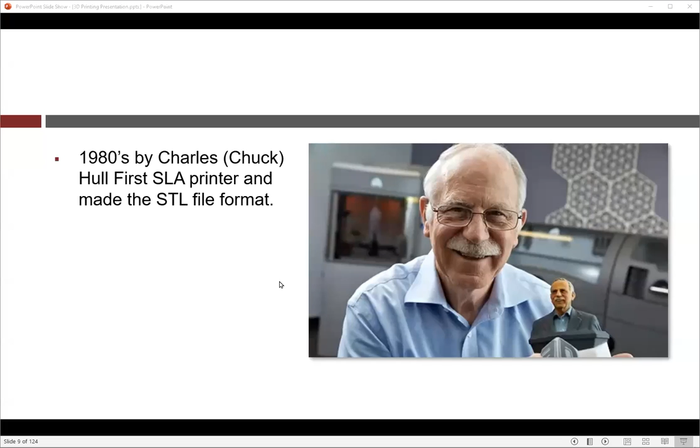So here is the father of 3D printing. He made the first SLA printer, and this is the printer itself and the actual object that he made. He did this by scanning a UV laser over a pool of polymer, and that polymer reacted to the UV and solidified layer by layer.

Aerospace is a biggie now. A lot of people have been seeing not only the Mars rover, but also SpaceX. SpaceX has been using 3D printed parts, especially for their Raptor engines, quite exclusively, and they're able to make parts with internal piping and capillaries that would be impossible to build any other way.

Archaeology. I know various archaeologists are scanning various artifacts and preserving them, also allowing those artifacts, especially if they're single artifacts, to be brought to classrooms and even tested and used for experimental purposes.

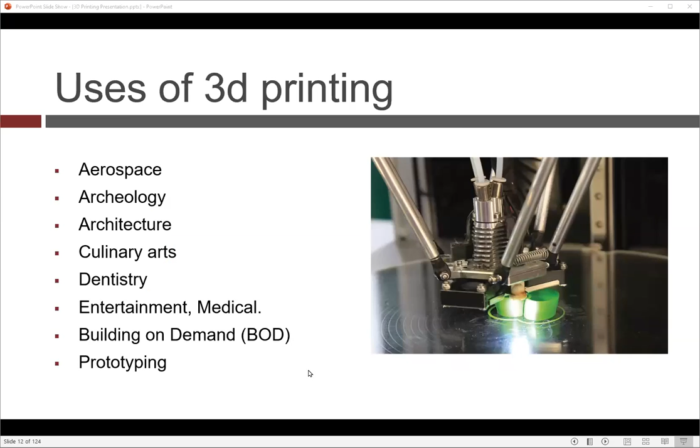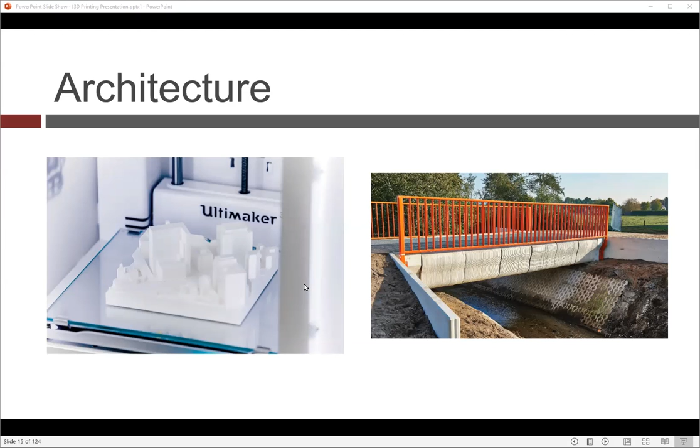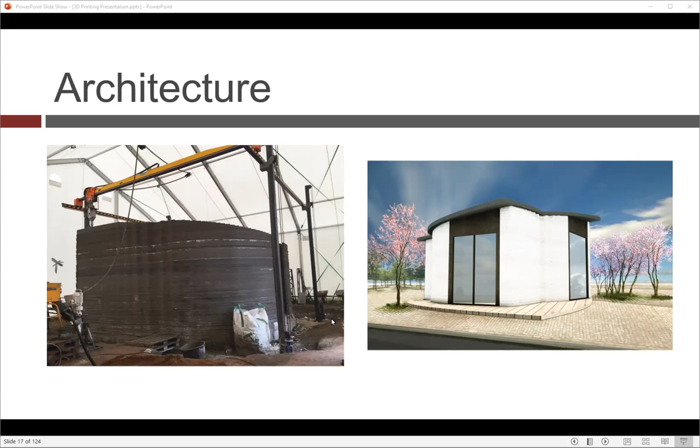And one of the things we're able to do with architecture, as you can see with this building, is print on a curve. Curves are very difficult to reproduce constantly using cheaper materials - they require molds, and anytime you have to do a mold or a prototype, it gets expensive. So this way you're able to print it, and then you're done. Cost effective.

All sorts of interesting things. One of the cool things about the culinary arts is that you wouldn't expect it to be in, let's say, catering, but anything that requires a rote action, hundreds of times over and over, is great to set up with a printer or something mechanical that you can run through. So they have a couple of 3D printers going, and let's say they have a very delicate pastry.

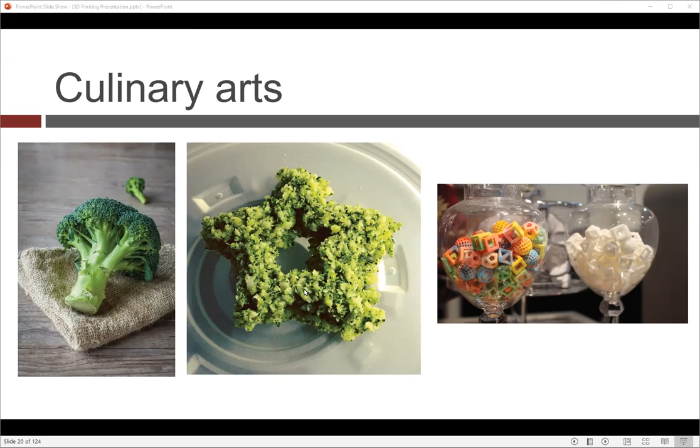They can have the 3D printer go out and actually make that pastry in the exact shape that they want, before they cook it in the oven, and they don't have to sit there and do it. It's exact every single time. So they're using that for effectiveness, and it's used a lot more than you might think in the background.

And in dentistry, the SLA printers, the resin printers, they use this quite substantially. In fact, most of the dentists I've talked to own at least one of these printers.

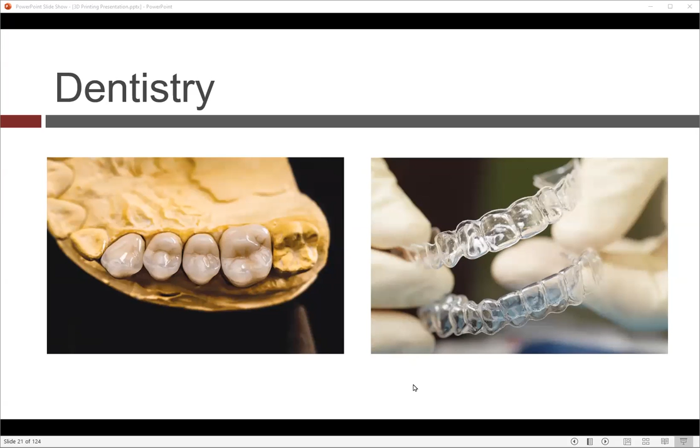In the medical field, not only building replacement parts, because each of these has to be custom made, but a big push has been happening recently with makers all over the world printing out hands and other prosthetics for children and people who can't afford prosthetics. The only thing you need to replace is you just keep all the screws, and they'll print you a new one when you grow. So for children, this is a wonder because they're able to have prosthetics that grow along with them.

I just want to add that we have a couple of links in the book to some projects, because there was a school out in the Midwest that took it on as one of their community projects, using their 3D printers to print prosthetics for a group of people and then send them out. All they needed was a photo and the size measurements, and they were able to use that to determine the size of the actual prosthetic.

What was really interesting about that article was that the middle school kids did the 3D printing, but they also helped the elementary students actually assemble them, putting the screws and things together. So they brought most of the school together to make hands that they gave out to people who needed them. It was rather interesting.

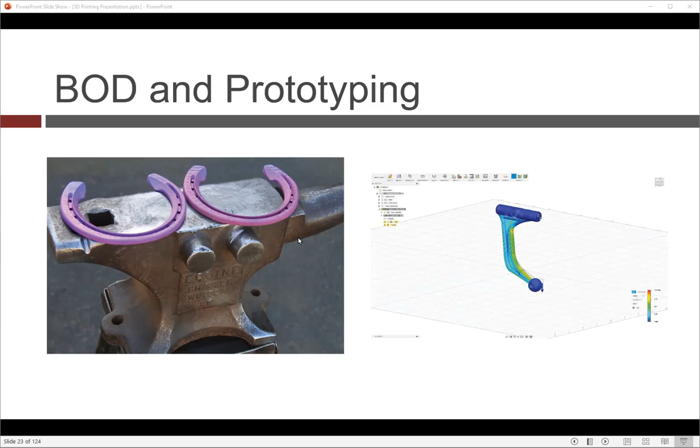And build on demand, this is a big area for 3D printing. Actually, this goes hand in hand with prototyping. It allows you to build something and make a one-off very quickly and very reliably, when normally you'd have to go through quite an extensive process to make that first prototype, or modify a non-custom part to fit a custom fit, like the horseshoes here.

Before we continue on, I actually neglected to do this at the very beginning. Is everyone here new to 3D printing? Have you touched a 3D printer before? What are you looking forward to with the 3D printer that the regional center has purchased and has available? Just curious.

Well, I'm new to it. We have one in our school, two actually, I think. And we have a makerspace that we're creating, so I wanted to learn how to use it so we can help create a curriculum and teach the kids. But the kids already jump right in and use it, and it's pretty exciting. Of course, that's great. Thank you.

Anyone else? Yeah, I just think there's a lot of opportunities for teachers to try this. Gary, that's great to see what you said. Because that's what we're thinking, teachers just need some opportunities to play with a 3D printer. Both of my children have 3D printed all kinds of things, but I haven't really played with it myself. Yeah, I'm looking to make 3D models of mathematical ideas for my classroom, like fractals and dimensional things.

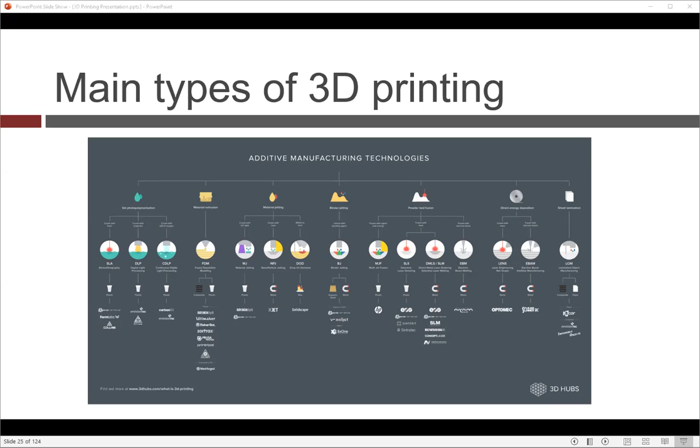Okay, stereolithography. This was one of the very first methods of 3D printing, and it's quite interesting. You scan a laser beam, you trace out an outline of the object you want in resin. That resin reacts, and once you're done a layer, the platform moves, and you rinse and repeat to another layer, continuing until you complete the object.

This is a very precise, very high resolution method. It can make parts that to the naked eye look like they've been blow molded, very smooth. So that's that version.

Okay, this is the second version. This one is very similar, uses the same plastic resin, but it does it inversely. It actually hangs the platform into the resin, doing it at the interface at the bottom. There's a piece of clear plastic at the very bottom, and either a light source is reflected up onto the resin, or you have an LCD screen, just like a normal computer screen, that acts as a mask for UV light.

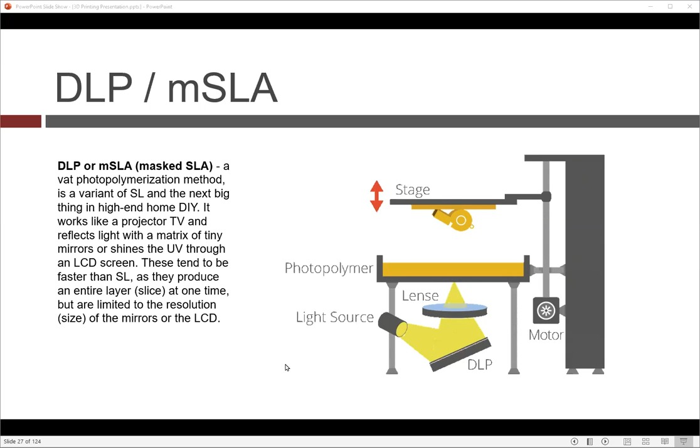Laser sintering. Another one with the laser, but rather than having the laser react with a photosensitive material, this is actually melting the material, whether it be glass, metal, or particles of thermoplastic, anything the laser can melt. Each layer, a new layer of material is dusted over and flattened, and that layer is effectively welded onto the previous layer, then the platform moves again.

And this is the one that most people are familiar with. I liken this one to, and you can actually buy these in the store, a hot glue gun on a plotter. You have an XY plotter with a hot glue gun. You have plastic material that you can melt, and you just follow an outline.

Coupling that with a computer and stepper motors and a full gantry, it can repeat that very precisely over and over. But when it comes right down to it, it is a hot glue gun. You can actually buy handheld 3D printers, a 3D printing pen, they call them, and build your own freestyle 3D prints, which is kind of fun.

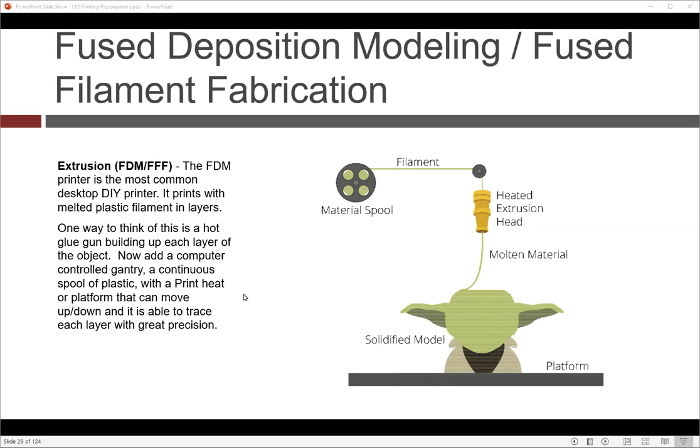So we're going to focus on the FDM and FFF type of printers here, because these are the ones you'll be working with. There are three major types. We have them outlined here, but they all incorporate...

Is that? Yes, yes, yes. Let's see here, what was the name of that? The Flash Forge. Yes, the Flash Forge printer. Oh, I had the name of it right here. We actually get into it later. The Guider 2, I think. The Guider 2, that's what it is. Yes, yeah, so that's what I was looking at.

I actually put the picture of the model here in later. So all of them effectively have a framework where you have X, Y, and Z motion and a printing head.

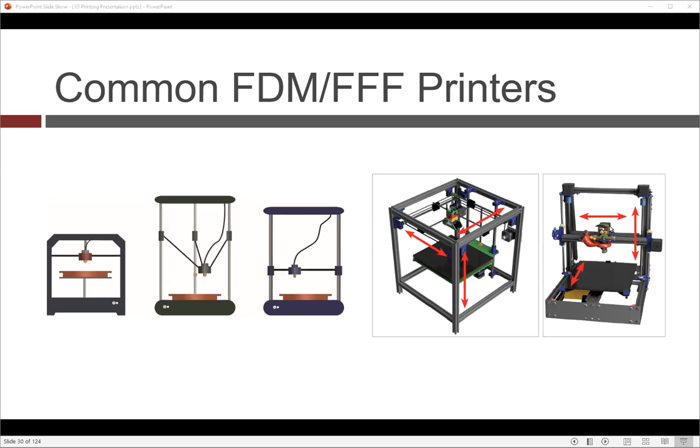How you get to that is done in three different ways, and here's a picture of three different types. This one has the bed move while the head moves up and down. This one is reversed, the head stays in this plane and the platform moves up and down, and this is a completely different type. As you see, they can use different coordinate systems. If anyone wants more information, it's in the book and I can explain it more later.

Usually this is kept from you with the software. I see someone laughing about that, but it is actually quite interesting. All right, and yes, the Flash Forge Guider 2.

So yes, that wonderful hunk of wood on the left-hand side is my first 3D printer, all custom made. It came as a kit from Makerbot, one of the first retail kits out there.

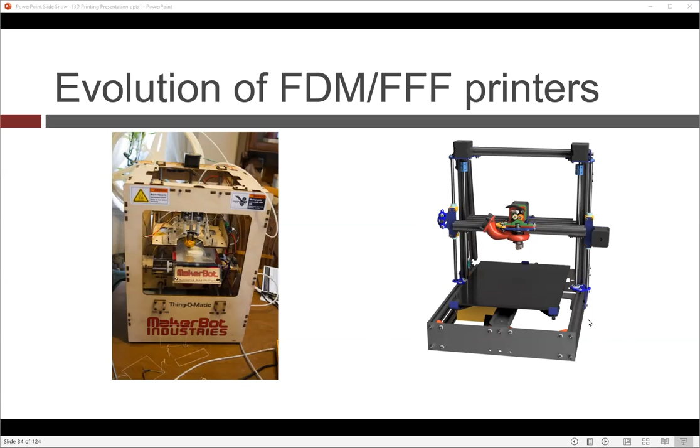This one on the right-hand side, you'll see these all over the place. This is essentially what's called an i3 configuration. A lot of cheap 3D printers, and some good ones too, will look like this because they're easy to manufacture, and there's very little to go wrong with these.

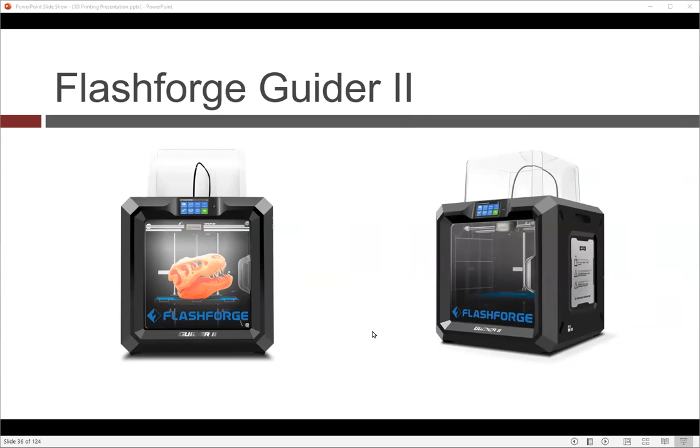So let's go over what actually goes into a 3D printer here. First, you have your filament - we're just going to go over this real quick. This is the thermoplastic in a spool. This is your extremely long piece of hot glue.

Am I going too fast, or is that good for people? Okay, we got at least one good.

Okay, getting a little bit more into the nitty gritty - the filament comes in two different sizes. The original 3 millimeter size was prominent when 3D printers first came out. These spools are actually used in factories, and the factories would run these, cut off lengths of them, and melt them as needed. Having such a wide diameter filament meant that the extruders in these DIY printers couldn't be very precise. As 3D DIY printers started becoming more popular, they made a smaller size, the 1.75 millimeter size, to allow these printers to be a lot more precise.

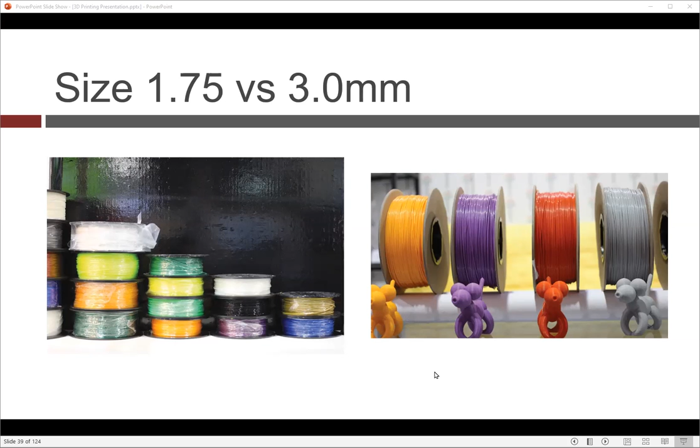So nowadays, most printers, except for the very large ones, will use 1.75. So if you're looking for buying filament, chances are it's going to be the 1.75 unless you have a specialty printer.

Like a typical little statue that you would have, this might not come into it. But if you're making a part for a geared car, or a little motor or something like that that has moving parts, you might want something that has good toughness, maybe some good rigidity. If it's going to be something that you're going to attach and you don't want it to snap right away, you want it to have some give, to stretch before it gives up and breaks. So this will come into the next section here.

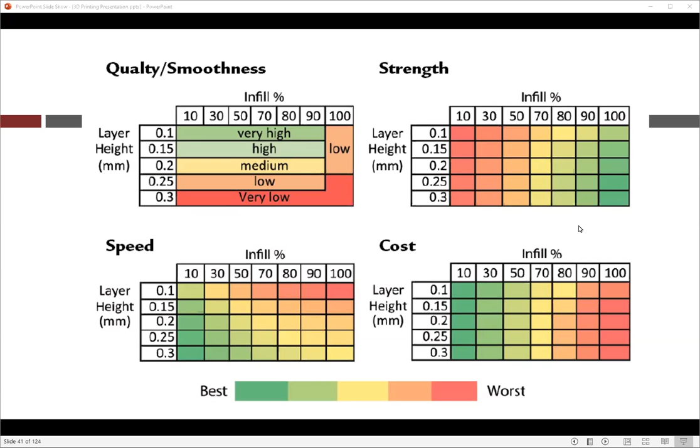If you increase... we'll get farther into this. This will come up again, but I want you to know that the materials themselves have all their own abilities, and how you print them will change those properties.

I think we lost you, John. Can we hear? There's no sound, John. Yeah, something happened. There's no sound. Hello? Yep, now we hear you. All right, well that was really weird. All of a sudden I heard a beep and I was gone. It wasn't me this time, I swear. Okay, well it's still sunny out, so no thunderstorms yet.

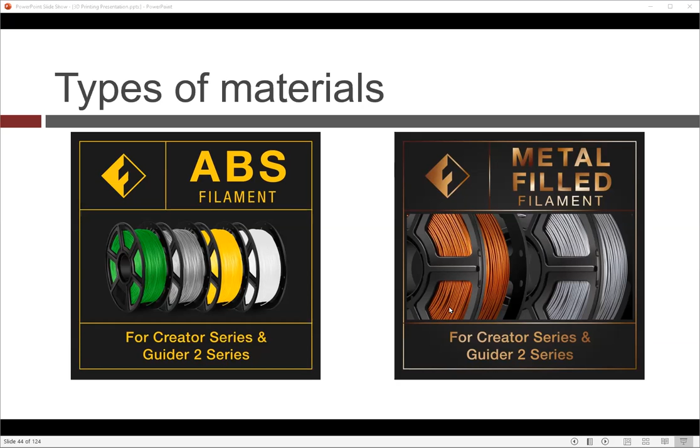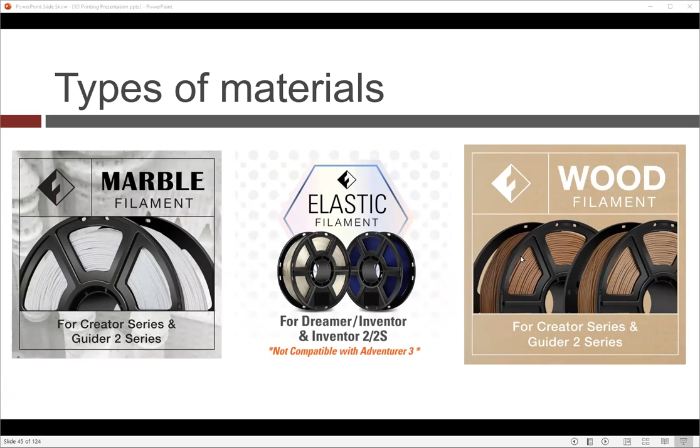This has small particles in it that give kind of a marble look. This wood filament actually has small particles of wood in it and is actually stainable, so this is quite fun. And this again is PLA, and this is also PLA. So you'll get the most variety with PLA.

Now, all of these plastics give off ultrafine particles and some volatiles when being used, so having a large, ventilated room is ideal. Another good point about PLA is that because it's done at a lower temperature, it's the least offensive here.

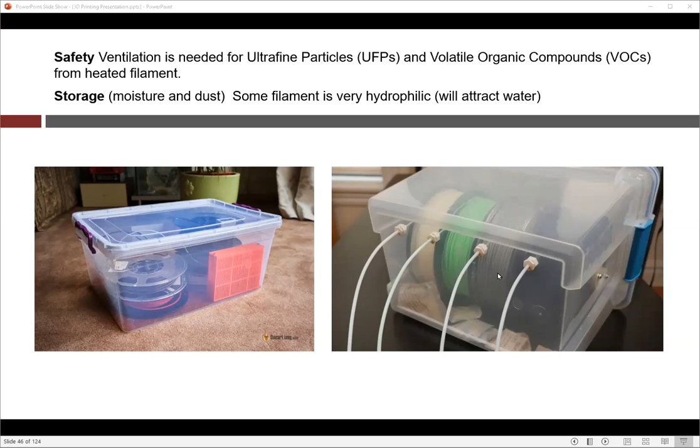So also, you'll want to keep all your filament in a container, especially materials like nylon, which will attract water, swell, and then when you try to heat them, create steam, and you'll have problems printing with them. So you want to keep them nice and dry. This is actually a little printing booth someone made here to allow you to print without being exposed to air. It's an issue where if you left a spool of filament out for a month, that spool might not be good anymore—it might get brittle and no longer be good to print with. So that's a consideration.

Is there any questions at this point?

I know, I'm going quite quickly here. If I'm going too fast or people have questions, do ask, because there's a lot of information I'm dumping here, and it just gets a little bit more dense until we get into the classroom area.

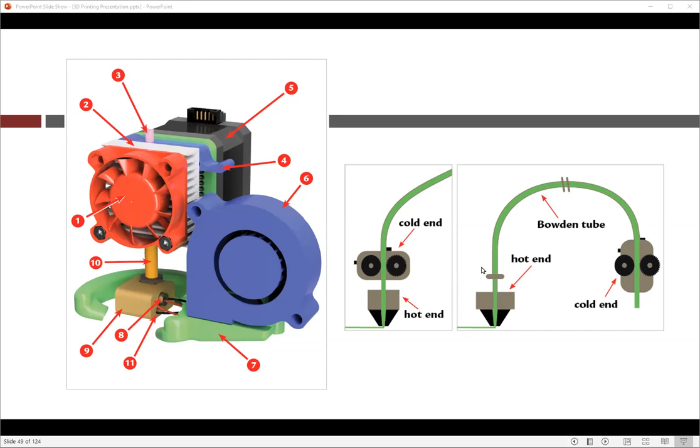Here's just a close-up. This is fairly typical of a hot end across most 3D printers. As you see, there's a little spring, and this toothed gear pinches and brings down the filament. This can be an issue with flexible filament - you'd definitely want a direct drive for flexible filament, because it's hard to push a rubber band through a tube.

This actually pulls it rather than pushes it. This is the hot end. You have your heater cartridge, and then you have your thermistor, which controls the temperature of the hot end.

This is your nozzle, and this is the heating block to keep enough heat to continuously melt the material. Some faster printers can actually push material faster than the heater can catch up, so these heater blocks can get quite massive to hold that heat.

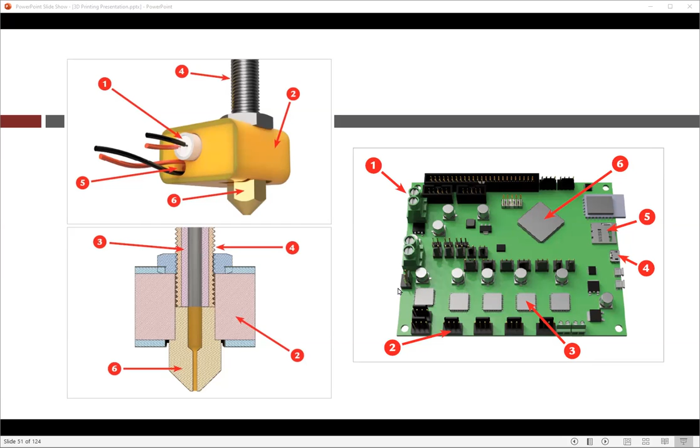Oh, okay, never mind. And on the right here is a typical motherboard with CPU power and stuff like that. This is less important—and here are some glory shots of your new printer.

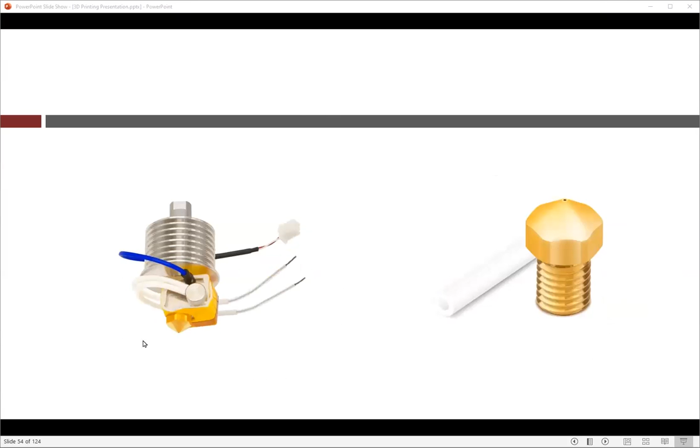This is part of the sensor that allows you to level the bed. It actually does have a fan and a filter that filters out the VOCs and particles, which is very nice. This is the hot end that's in that plastic container and the nozzle, and this is where the filament guide is.

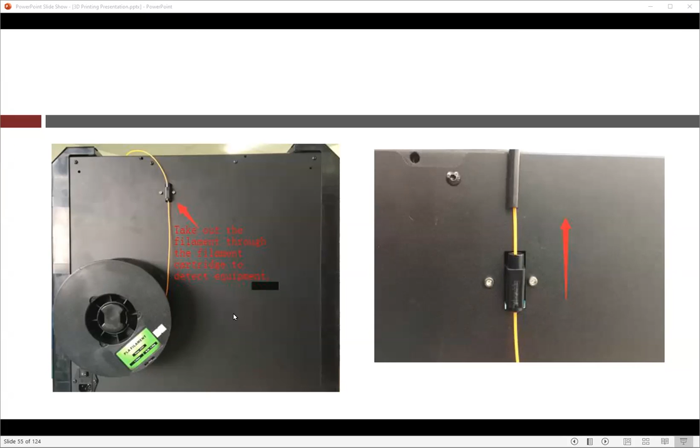One of the nice features with this printer is if you run out of filament, it will pull it through here—this is a switch. It will stop the print, pausing it to allow you to load a new spool and start the print where it left off, which is amazing.

Any questions from there? I went kind of fast—I hope that wasn't too much of an avalanche of information. No, it's great info. Okay, we're going.

All right, so now we're getting into software, because all in all, this is a software-run machine, and software comes into the process at a couple of points. The original objects you'll be printing out will be models constructed by a variety of different pieces of software.

Here's a quick list of very common ones: Tinkercad, Sculptris, and everyone has 3D Builder on Windows. These programs allow you to either make parts—some of these are CAD programs—or, like Sculptris, are freehand sculpture programs that allow you to make very organic shapes, people, animals. Some programs do a bit of both. Make Human is dedicated to making humanoid shapes.

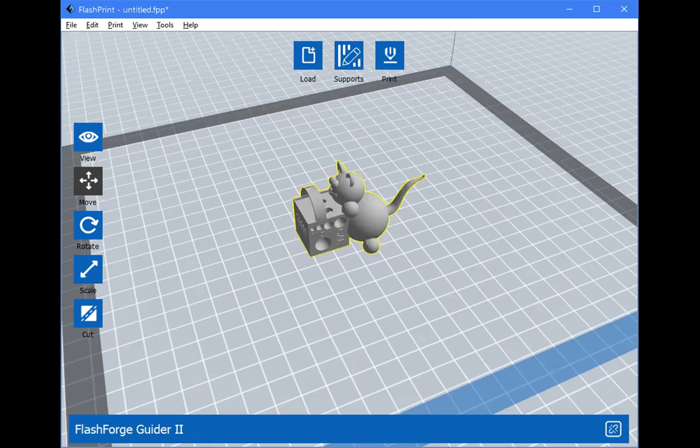And let me see if I can transfer you over to... there we are. Can everyone see that? All right, so we're now live in FlashPrint.

This is one of my test models. It's the Mau Cow, because cats. I made it myself, then imported it into this. I made this myself in, I do believe, Blender. It's in the models in the book too, so they can use it. And I modeled it to show off a lot of the issues you can have with 3D printing.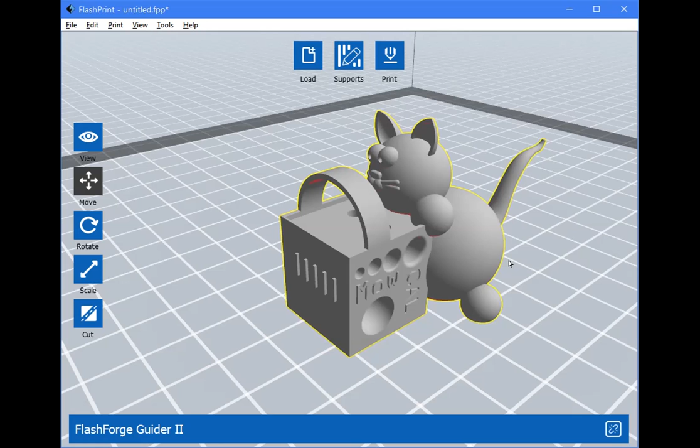Let's get a little off on a side tangent here when we're talking about overhangs. This tail, there's nothing under it, so when the printer starts trying to print this, it's going to be printing in the air, and it would never print this tail because it would just become a mess. So your slicer will have to do something about that. In fact, when you look underneath this, everything that's blue is on the build plate, the build surface. Everything that's red is an overhang. So that gives you a nice visual cue of what things might need to be supported.

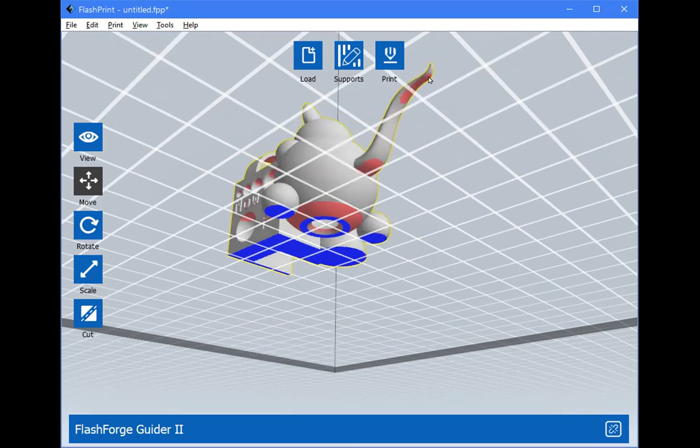So the end of this tail requires support. The mid part of the tail doesn't, because one layer can go on the layer below without being completely on top of each other - they can be offset. If they're only offset, you can make a 45-degree angle with absolutely no problems. Anything more than 45 degrees starts getting a little bit more dicey. When you get to about 90 degrees, it has nothing. Okay.

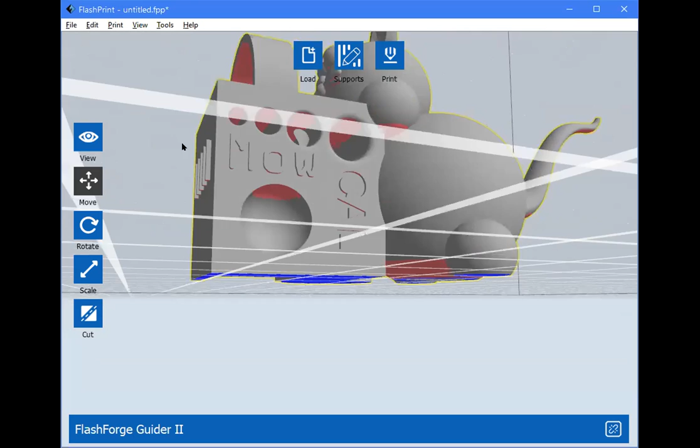Rounded surfaces tend to need support because the curve here is below 45 degrees, while the curve here is greater than 45 degrees, and same with this curve and some of these other areas here. I'll get into these internal spaces.

So from here, we get to see the top view, left, right, bottom. This is a nice 3D space, and you can move around in it. This volume is the volume of your printer, anything that fits into this square you can print. It's a good size printer.

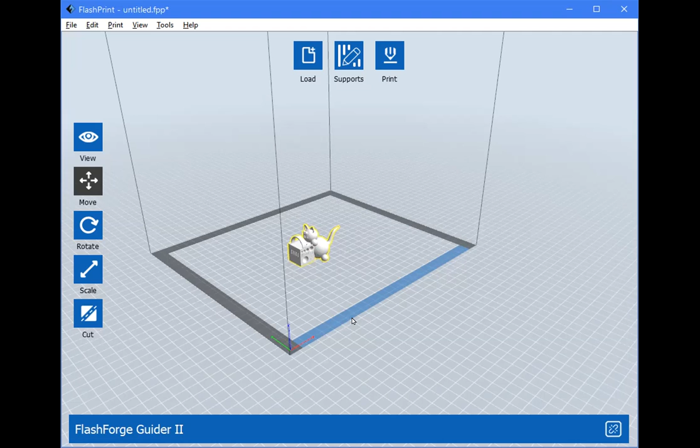That's quite nice, and I think this line indicates the front. You're able to move your part around, and this program will automatically orient it onto the build plate. You can see the stats here, and you can force it onto the platform and force it to be centered.

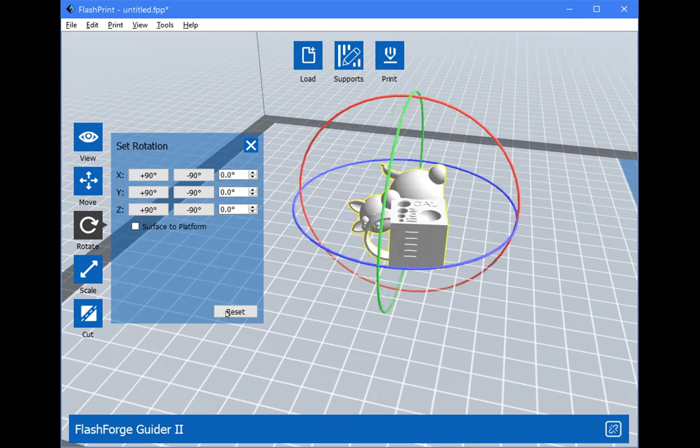Rotate - let's say if I want to print this on the side, I can rotate it in any dimension, or reset it back to where it was.

I can also scale it up if I want to, so I can make it larger or smaller. Let's make it larger, uniformly or by a certain dimension.

You can also cut an object. This is usually to break an object into two pieces because it's particularly hard to print, has too many overhangs, or there's not a good way of printing it. So you can cut it in half, put those two flat parts onto the build surface, and then glue them together later.

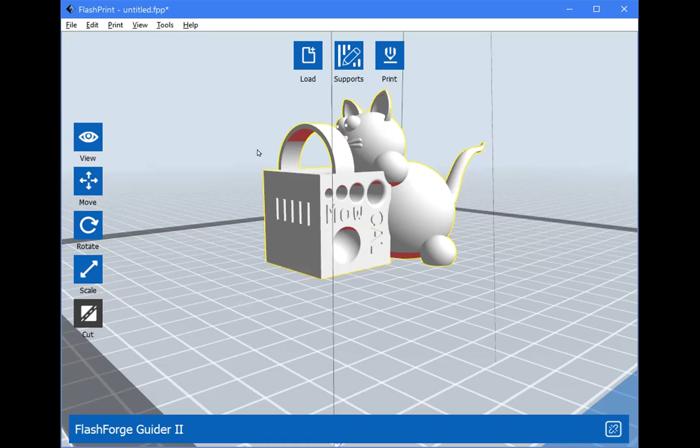Then when you're all done putting this on, now we can get into the support area and hit this wonderful button called Auto Supports. Let me change something real quick - it's doing the wrong type of support. There we go.

There we are. So as you see, all these green lines are where it's building up material, which you can break off later, and will support your model. And there's this line that I can put around, so I can put these supports in manually.

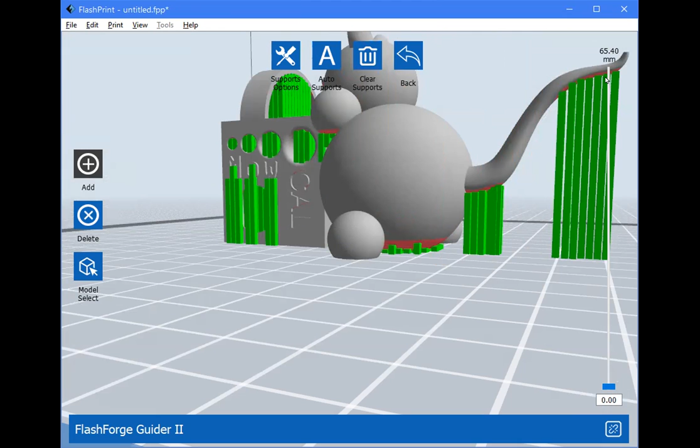Auto support usually does a pretty good job, and then you can finish it out doing manually. This is a little bit of an art form - you want supports, but you don't want too many supports. If you go overboard on supports, that's just wasted material. So you'll find that happy medium where you're just like, oh, this is exactly what sort of supports I need.

For this material - materials like PLA, like I said, is easy to print with. So, potentially, it depends again on the material and some other factors.

This can be a rough surface, so you're absolutely right.

When I was printing out the 3/4 scale head, I had the head leaning backward about 30 degrees, so all of the face was facing upward about 30 degrees, so there would be no supports on it. There was only a little bit of supports under the chin and a little bit in the back of the head and in the neck cross section. The rest didn't need supports. I think there were some minor supports under the ears and maybe one under the nose. So orientation can allow you to minimize where the supports are and thus minimize any damage the supports would make.

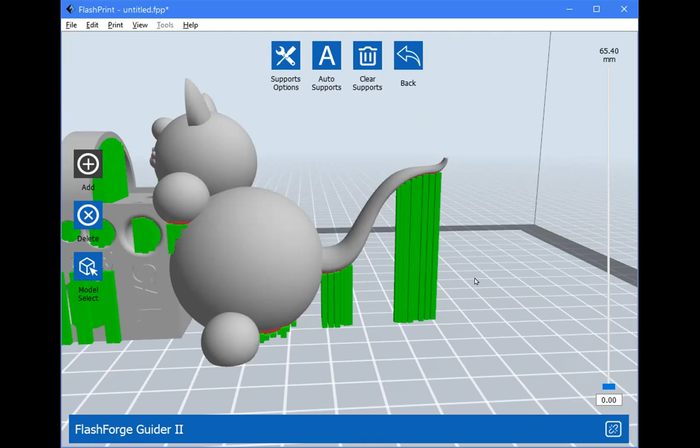And at the very end, I go into some quick cleanup and ways of getting rid of any issues, even using various putties to fill in cracks or rough areas if you're going to be painting them.

This model is particularly made to be painful to print. So if you can print this model out very nicely, that means you're doing a good job. If there is a specific issue with this print, it'll help you figure out what that issue is.

Like this tail goes down to a very fine tip - well, you have both supports here and the printer will be going over this very small area over and over again. That cooling ring that's on the printer cools the filament as it's being deposited.

If the printer goes back to that spot before it's fully cooled, it's just going to start moving around that material, and that material will also be getting hotter and hotter, and you'll get a mushy mess. There's degrees all the way in there. If you cool it too much, it might become brittle and not adhere to the next level. So finding that happy medium is a thing.

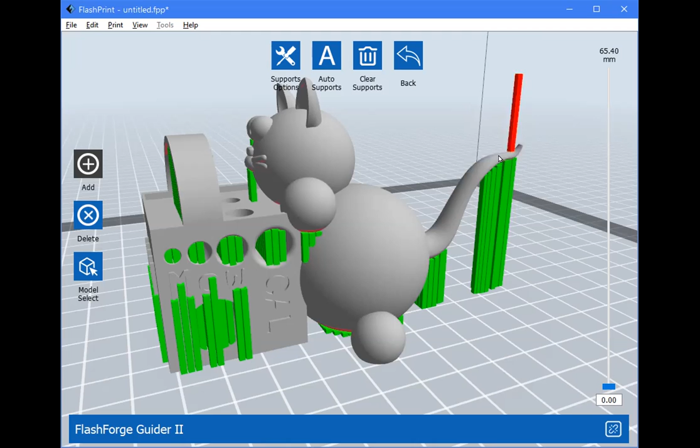Typically the program takes care of that, but it's a place that you can play around with, finding how much cooling you use. PLA loves cooling, so it's a wonderful material to use.

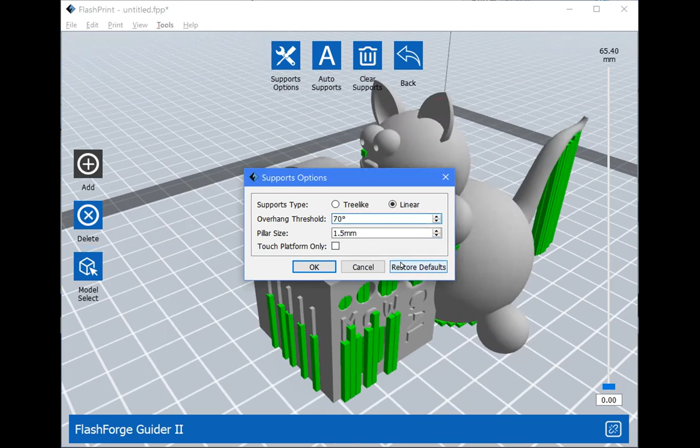With this handout, there is in the book a list of troubleshooting. So, seeing a problem, you can look in the troubleshooting area and identify what the problem is. As you see here, I can actually change the overhang threshold, hit supports again, and as you see, I increased the limit so there's less supports. So with PLA, you might be able to get away with this.

With ABS, probably not, because it would sag.

So some fun things here, and then you would go to the print menu. You'd pick which printer you need, what type of material, because it will handle some of the things like cooling, how fast it's pushing the filament through, and various other options through material types, whether or not you have supports enabled.

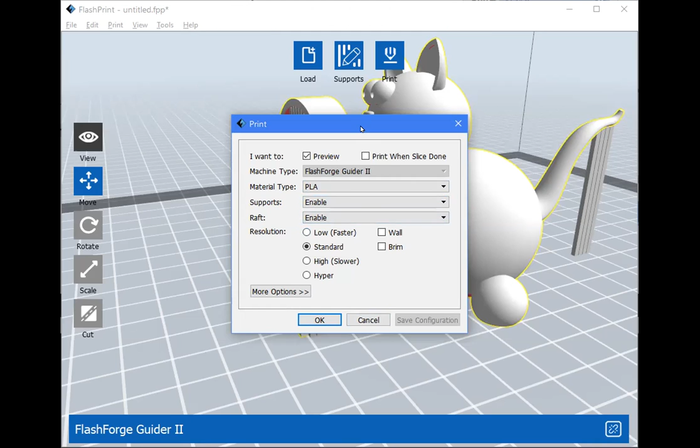A raft will allow you— so what, let's print a raft. I just told it to do its thing, and it's now slicing it.

All right, now this is a fully sliced object. I made it large, so it estimates that this is going to take 4 hours and 17 minutes to print. It's going to use 14 meters of filament, which isn't actually a lot.

And we can actually look through this and see all the layers. So this base part right here, which wasn't there before, this is called a raft. This allows you to build on plastic rather than the build plate. Old school 3D printers, getting that build plate perfectly level was super hard.

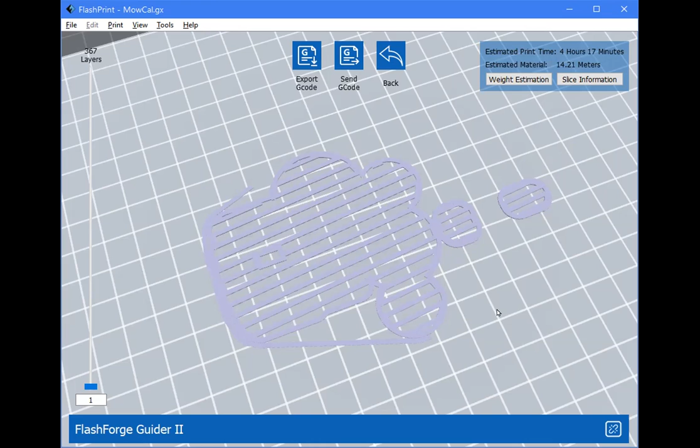So you almost always printed on a raft because you don't want that print head smashing into the build plate. If it was just a little bit off, you would always smash into it on one side. With the modern printers, that's less of an issue, but you can always print with a raft. It uses up more material.

Then, as you see, here's the outside. I wish it would actually do it in different colors, but that's the limitation of the slicer. This hexagon pattern is what's called infill. Rather than making a solid part out of plastic, there's really no need for that. It is taking that interior space and making a nice strong honeycomb out of it.

You can change what sort of infill you want to use. This also is an added benefit when you get to the top—as you see, it puts a roof on. This acts as support for the top of your object, so essentially it's built-in support. As you see, it's even building support in this hollow section of the cat because it needs to fill in this area right here.

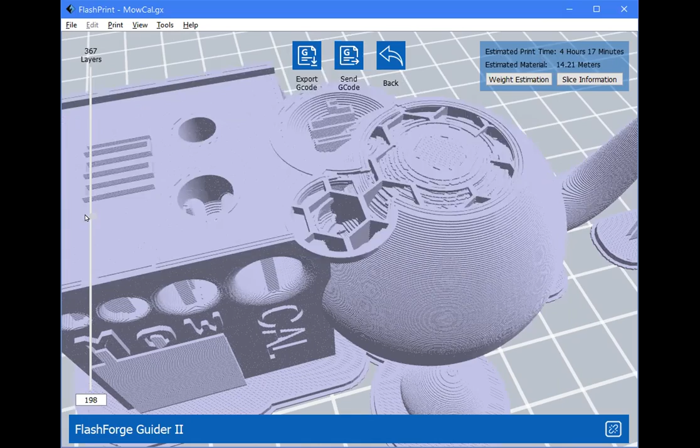So this is endless fun going through this. As you can see, it built up nice supports here. You have a nice base for the supports. And the printer would print this out just like that.

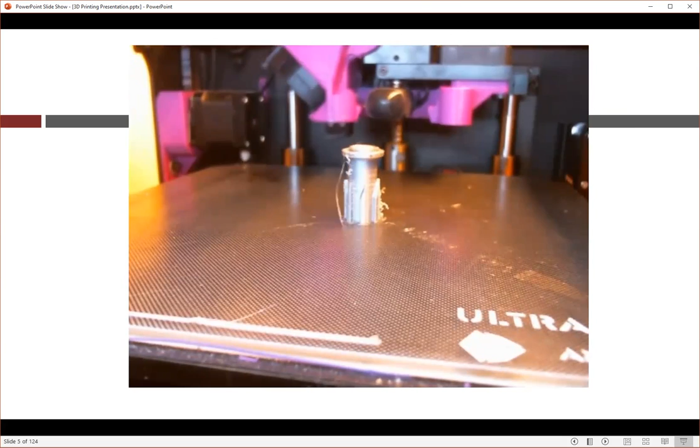Should give you a good idea—I think that's for a Nerf gun—good idea of what it should look like while you're printing and how it does layer by layer.

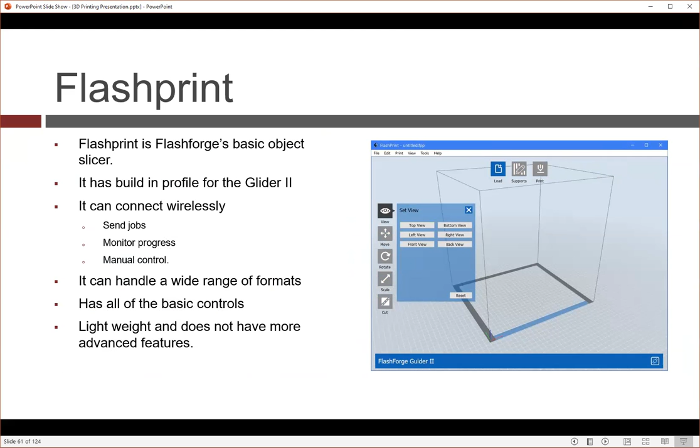So as we're seeing, this program also allows you to send your jobs wirelessly, allows you to monitor progress, and allows you some manual control of the printer, so you can raise and lower the print bed and put in the filament, because you need to actually heat up the hot end to put in the filament.

And as you see, the first layer height is a little bit expanded. This allows you to have some error wiggle room for the print bed.

Shells is pretty much how many walls, because each time it goes around, it's making a line, and that line is going to be just over 0.4 millimeters. So is that wall 0.4 millimeters, 0.8 millimeters? It's going to be a multiple of 0.4. Typically people print with 2 walls. If you want a strong part, I would go to 3 or possibly 4.

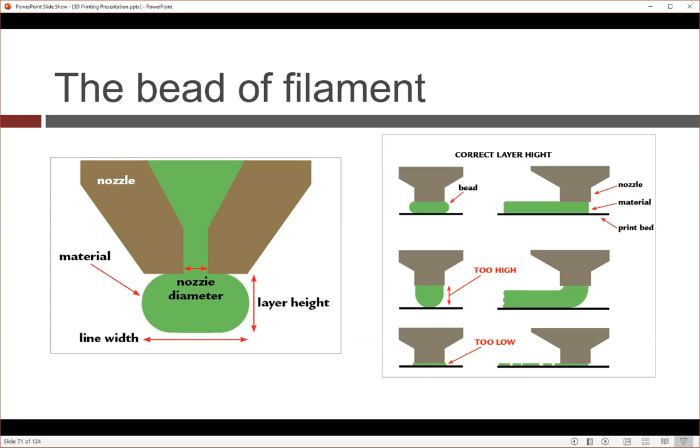If it's too low, your extruder will struggle to push out the material, and anything that it does struggle to push out will be spotty and smeared all over the place. This is also a danger of knocking the print off, because your head would crash into the print or dig into the build plate. So I should have switched out here.

So material not sticking, too squished, perfect, about 20% larger. And here's a physical picture of how it goes wrong.

Layer heights. On the far right-hand side, we have, let's say, a layer height of 0.3.

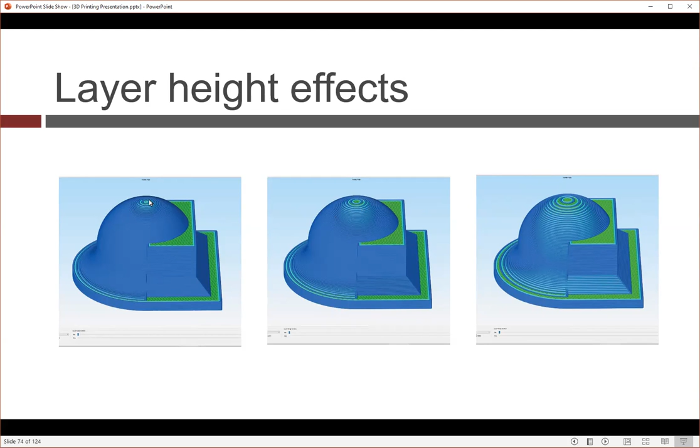Here is a physical shot of a print. As you see, going from the coarse 0.3 layer, these are all done with the same nozzle, down to 0.2, down to 0.1.

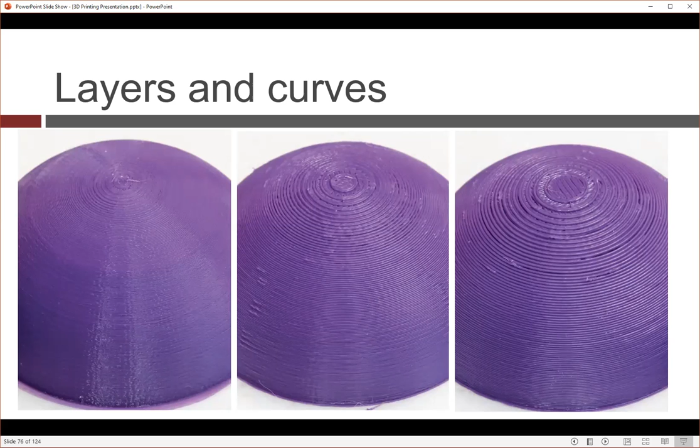Another interesting part about this is that the 0.1 takes twice as long as the 0.2 to print. So when you start jumping these steps, the time it takes to print these out increases dramatically. Remember those matrices I showed first: print quality and print time can conflict a bit.

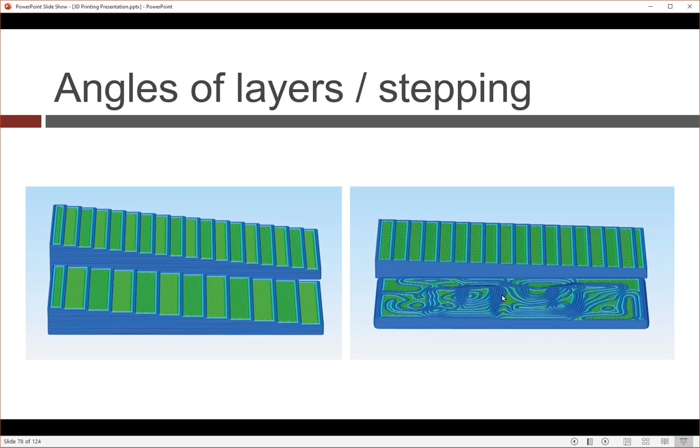Here it is at an angle, and you can see the stair stepping. Same angle, different layer height. And here we go again, different angles, done more in a topographic look. You can actually see low res versus high res. And if we want that not to be stair stepped, we change its orientation and print it vertical.

Here's a quick overview of infill types: rectilinear, honeycomb, all these different infill types. You get to pick which one you want to use. The denser they are, the more they support the top, but the more material they take. The less dense, the less they support the top, and you might get the top sagging a little.

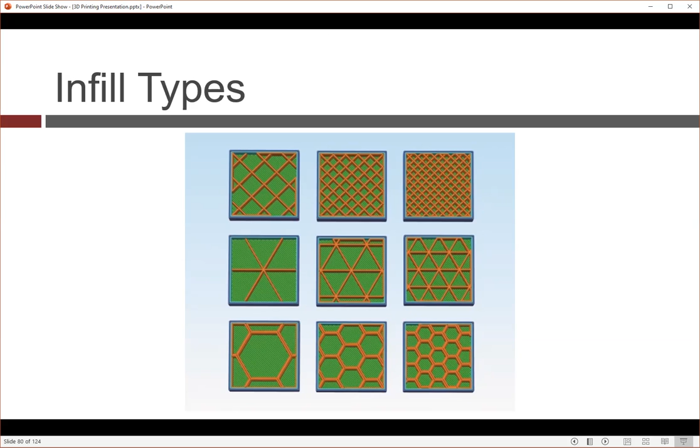Now we're onto supports. Like I said previously, no supports are required for anything less than 45 degrees. 45 degrees is perfect. Anything greater than 45 degrees, you start getting into the danger zone. I've been able to print close to 70 degrees without any issues using a strong fan, so there's definitely tweaking room.

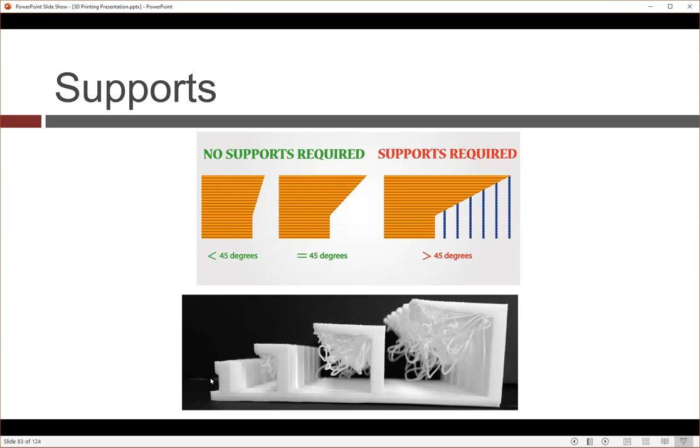As you see on the bottom here, this is what happens when you don't use supports - you get a tangled mess. So you definitely require supports. Also, the farther the support goes out, the larger the tangled mess.

Depending on your printer and cooling, you can actually print a piece of filament spanning that area with minimum or no sagging. The larger it gets, the more chances of sagging, but if it's modest in size, typically anywhere from a centimeter to about 3, you can get away with it. So you can print small bridges with no problems and no supports, while large bridges will tend to sag and require supports.

This is a fundamental concept some people have trouble with, and I think this really helps visualize it. As you see, what happens is a bird's nest - this is what happens when your print breaks or gets knocked off, and you end up with a pile of junk. This is what happens when you don't have supports versus when you do.

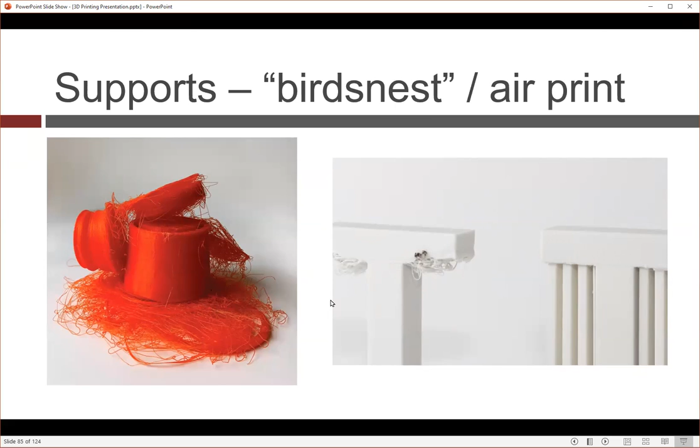There are different ways of supporting something. If I put this block down and support it on these two sides, I would have a lot of scarring on those sides. Or I can do it like this, so I only have scarring on one side. Or I can print it flat on the build plate and potentially have no need for supports for a cube.

Something a little more complicated would be the shell. Printing the shell on the side, you would have supports all the way down the side. Since I'm printing this vertically, I only have a small amount of supports, but run the risk of this thing snapping off and being ruined. So there's a lot of wiggle room and a lot of experimentation - this is where I have a lot of fun.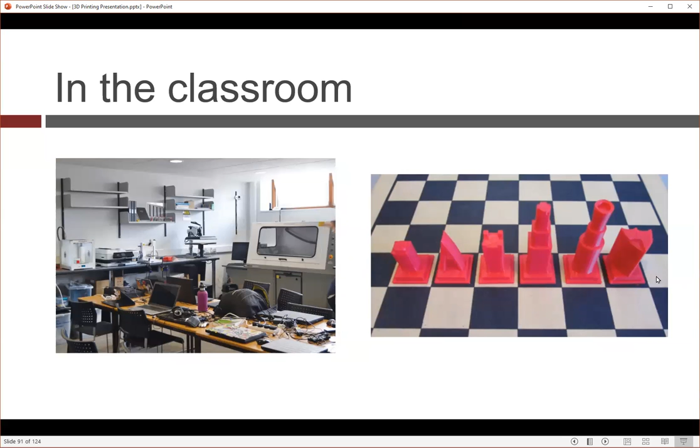Here's someone making, here's a classroom, and here is someone making their own chess set, and so on.

Now we have uses in the classroom that are all over the place. It's a wonderful thing because you're creatively thinking, you're engaging the students. You can make items that they can learn with, and they can learn while making the items.

Just the process of learning how to 3D print, and a lot of the stuff that I've already gone over, is an interesting and useful thing to learn in itself, let alone concepts like material properties and physical properties. A couple of chapters in the book cover this a little more in depth and give examples and ideas. I think in the beginning of the book, like chapter 3, and then later on in the book, we'll have examples and some links.

Yeah, job ready skills. I know a lot of people for whom it's now becoming their full-time job. It's a lot of people's part-time job, where they're printing out items constantly for people, for themselves. There's entire networks out there where you can say, hey, can someone print this out for me? And there are entire maker groups that will print that out for you, making tangible objects and everything.

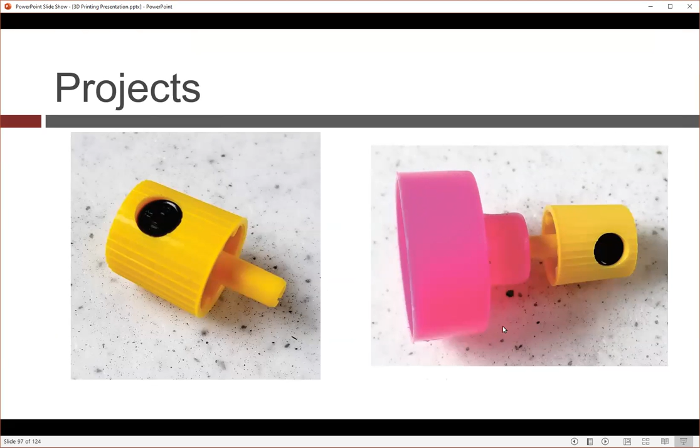This quick project: the top of the spray can broke. This is no longer functional. That's what I'm working with. I only have this nozzle. This would be the replacement, but the replacement has the wrong size hole. Bring it into a CAD program, make a simple shape, make the right size holes, print it out, and now I have my object, my functioning adapter.

This is actually something I did. I needed the adapter, so I sat down and made this in maybe half an hour.

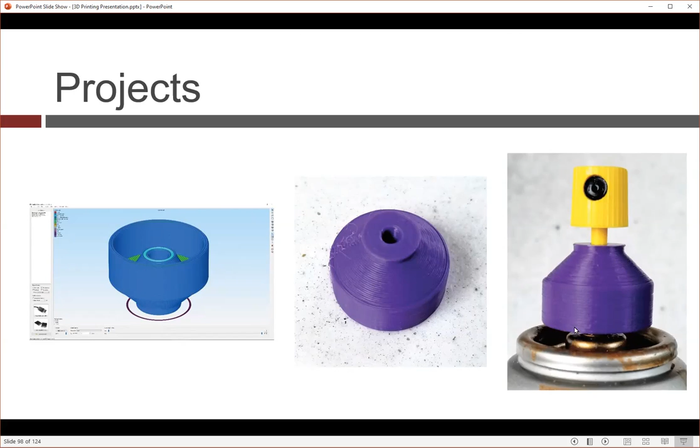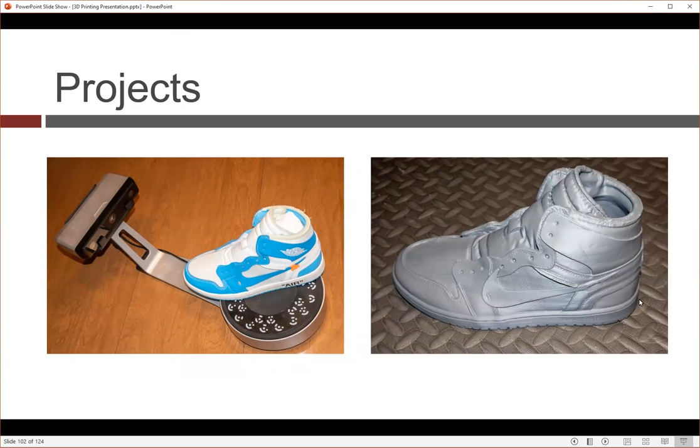This is a sneaker being set up for a mold and a pour to be turned into bronze. This is an ongoing project, so maybe later I can send what this finally looks like all shined up.

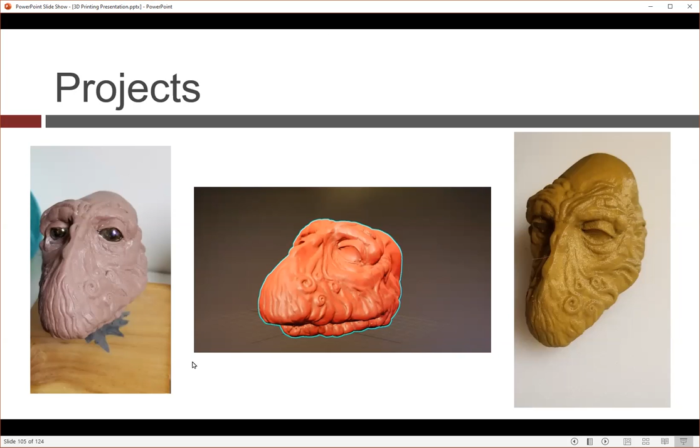This is a project going from a sculpt someone recognizes. This is something my wife sculpted in clay, was 3D scanned, in Blender, printed out, and then made into bronze. It's currently being patinaed, and we should be getting that later in the week.

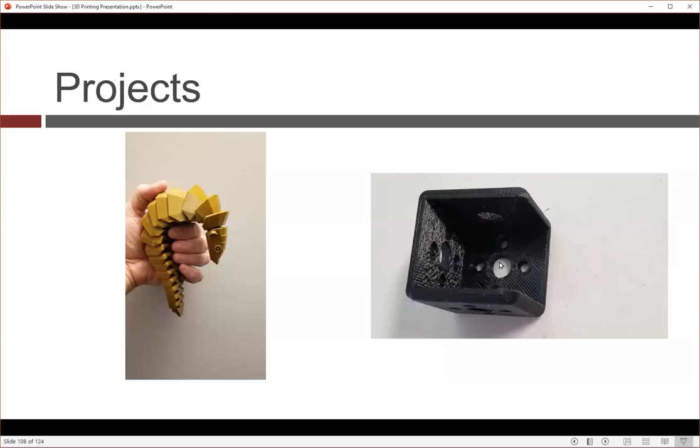Another device, this is, you put a piece of wood in here and this will move that wood back and forth.

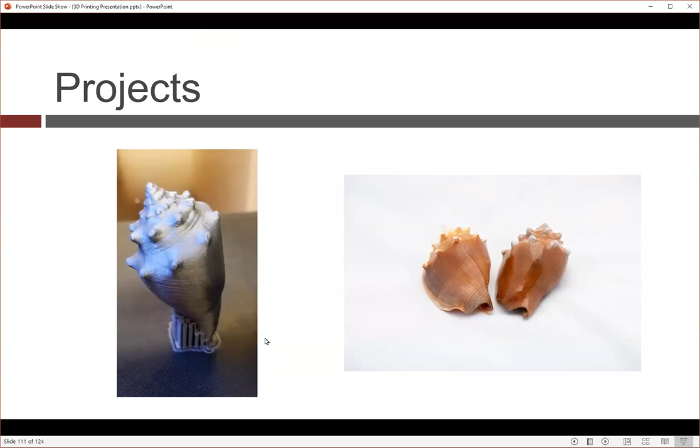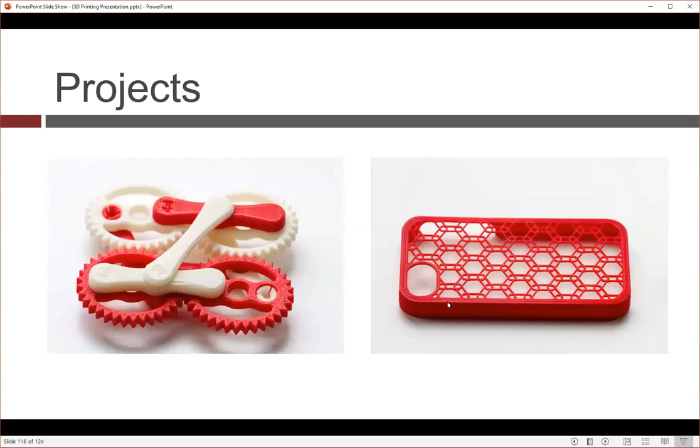Quickly, the maintenance. I know this was asked earlier.

Knife, razors, needle files, cutters, dental picks, deburring tool is one of my favorite because it's made specifically for this. Needle nose pliers and sandpaper.

It's used to get off all the little nibs, to remove the supports, remove anything, clean up rough areas that supports were at. You can also use modeling putty, repair putty.

There's gray filler primer spray you can buy in a can, and triple thick glaze spray. Both these sprays you spray onto a model and they give that first layer, which will fill in the layer lines and also fill in any cracks or bumps.

Then you go back and sand that. With the triple thick glaze, you don't necessarily need to because it tends to self-level, but the gray primer spray is beautiful for that. The putties are great for if you have a crack or if you're gluing two parts together.

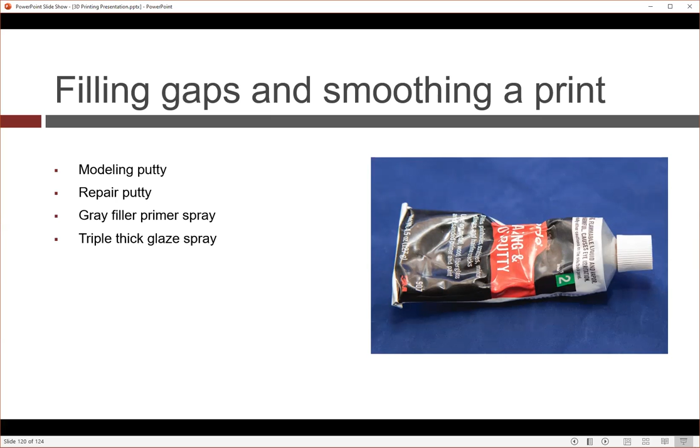So printing it out doesn't have to stop after you're done printing. You can go into quite a few different levels of post-processing, cleaning up, and artwork after you're done printing.

I also printed out a baby Groot, but I couldn't put him in because of, well...

And in fact, I have an SLA printer myself, and I also print miniatures, and painting those is quite fun and difficult at the same time.

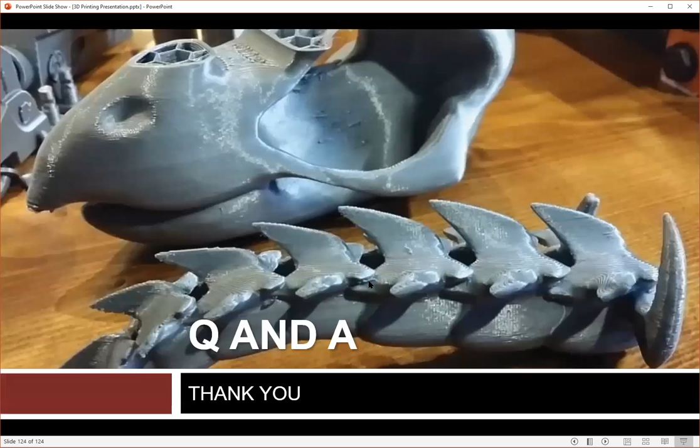And actually in the background, this is a prop made by one of the people in the book that we highlight in the book.